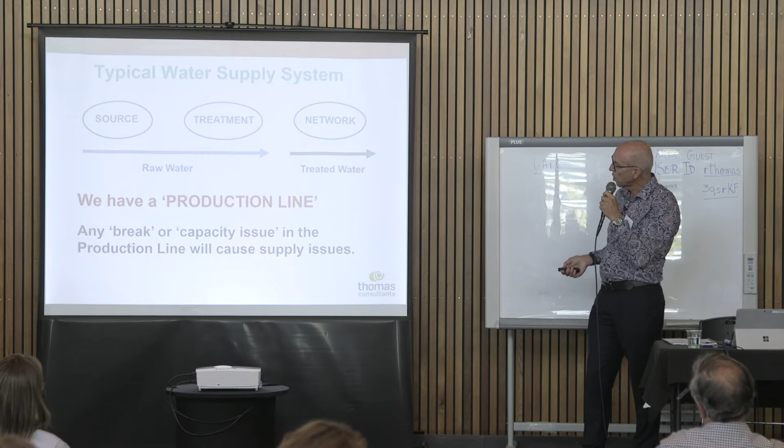And so any break or capacity issue in the production line will cause supply issues. So it might be back here, it might be in the raw water main, it might be at the treatment plant, it might be in a transmission main, it might be in a local. Any break in the line can cause supply issues. So there are supply risks and there are capacity issues. So I'm going to talk for a bit about risks to sources.

Now we all know this is a common one. Under average rainfall causing low levels in lakes, rivers, storage dams and aquifers. So we get that around New Zealand quite a lot. We've had a fantastic summer, if you could call it a fantastic summer, but it hasn't rained in Auckland many days for about the last 3 or 4 months. So we're certainly getting it here in Auckland, and it happens around New Zealand, causing low levels.

Algae in stored water. You can get algae turn up in a storage reservoir that's used for water supply, and all of a sudden it needs extra treatment or it's not treatable, so that can be an issue. River and dam levels are so low, water intakes are left high and dry. That's nearly happened to a town in New Zealand probably around 10 years ago, but I recall it happening. And what a disaster that would be if you can't get the water out of the river into your water treatment plant.

Storms affecting raw water quality in streams and storage dams. There can be inundation with silt-laden water. A treatment plant can't treat brown water, when it's that bad. So these things can happen.

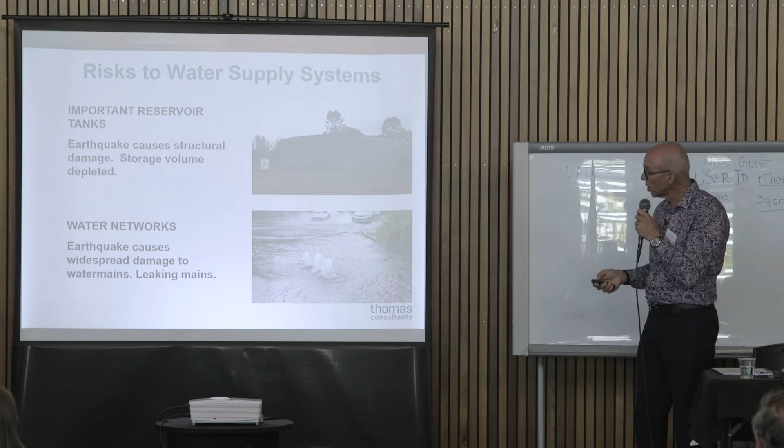So many of those above risks could be considered short term. We're talking days, weeks or months. And hence the main issue is maintaining supply during the event and while repairs are being made until supply is reinstated. So any available storage becomes critical, and you don't want to run out of water or you're into tankers, etc.

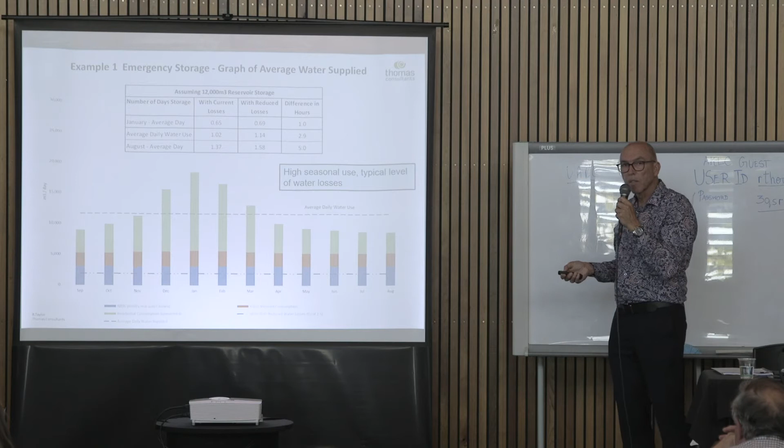So what am I saying here? I'm saying, assuming this town had, say, 12,000 cubic metres of reservoir storage, which is about an average day. See, that's 10,000, 15,000. So the average daily water use is around 12,000. And quite often towns have 24-hour storage. Well, with the current level of losses, in January, you've actually only got 0.65 of a day. Average daily use, you've got just over a day, just over 24 hours. And in August, when you've got low water use, you've actually got 1.4 days. So you've got more than a day.

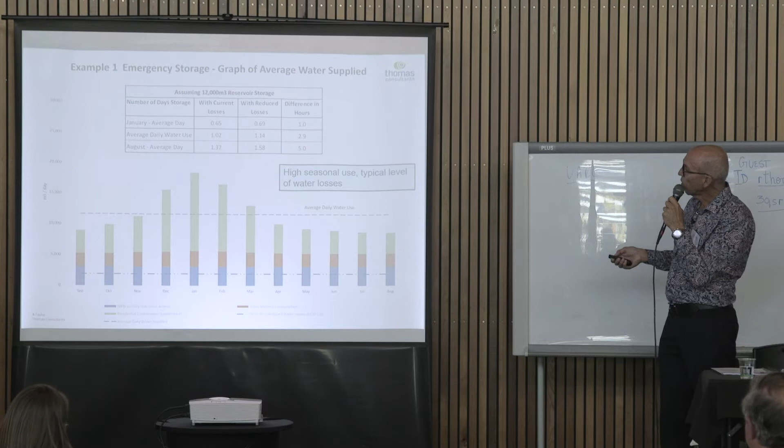Now, if they reduce the losses down to here, those figures improve to 0.69, 1.14, 1.58. So the difference in hours, you can have an extra hour in January. It doesn't sound much, but you've got an extra hour. For average daily water use, say in November and around this time of year, you'd have an extra 3 hours of storage, and in August you'd have 5 hours. So over here you've got 5 hours of storage.

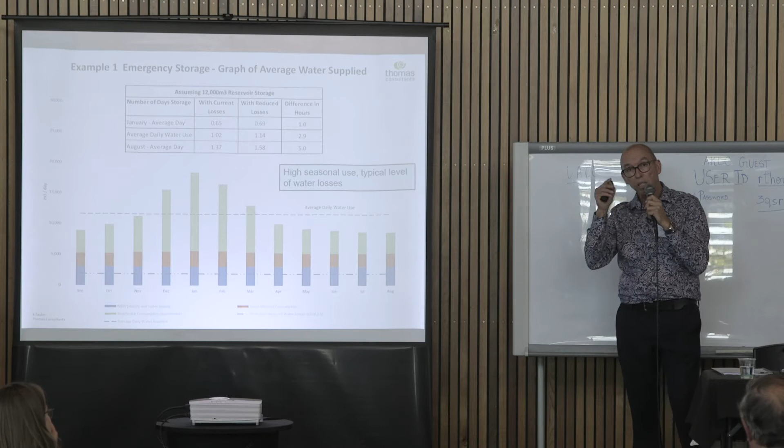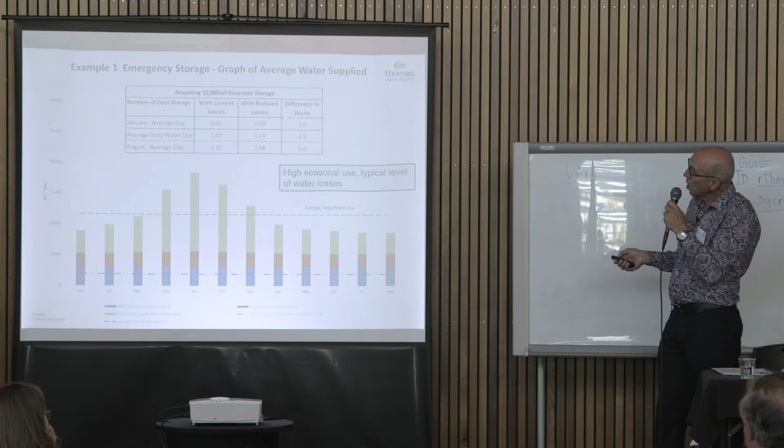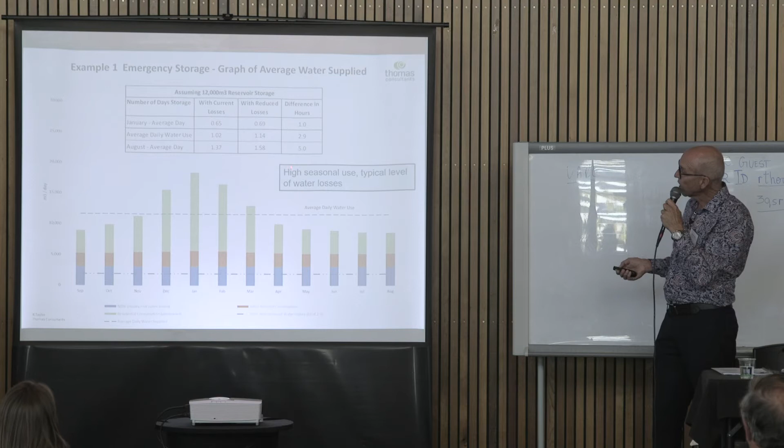Now, why is that important? Because you don't know what's going to happen, but if you get a slip, like actually Taupo had a bad slip, didn't they? It went down into the lake, and it wasn't a 5-minute job to restore supply. But if you've got a broken main, it typically might take 5 hours to fix. 1 hour out of 5 hours is significant, it's another hour. And similarly, these other numbers. So even reducing a moderate level of losses to a better level of losses can have an impact in an incident. So that's what I'm trying to say.

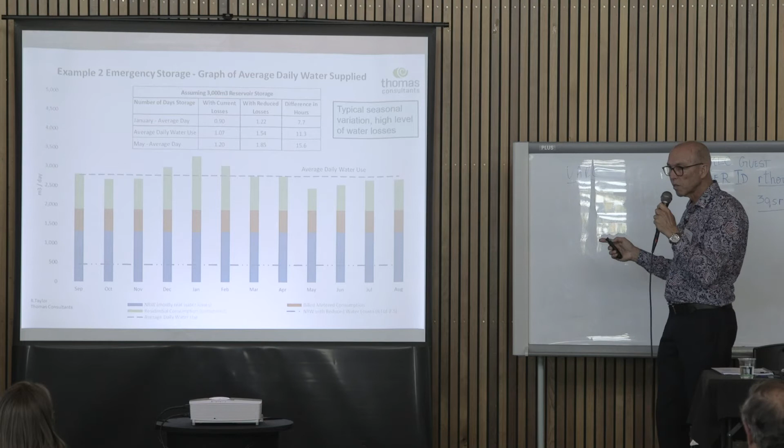So if they reduce it down to this level, an infrastructure leakage index of 2.5, for January, the average day, and for May, you'd have an extra 8 hours, 11 hours, 16 hours. And the numbers are a lot bigger because you've reduced the losses by a lot. So if you have an incident that takes out part of that production chain that is measured in hours or days, this can be significant. So that's one reason I think water losses are important.

What's happening with climate change? Well, I think we have had significant periods of hot weather resulting in record-breaking water use and demand, and we've had that in Auckland, Northland, certainly this summer. And actually, also with COVID-19, water demand profiles are changed as people's travel and holiday arrangements are altered. So you've got a whole lot more people holidaying in New Zealand, I think, and so things have changed.

Now I've got a real-life example here, because I was up north, and this article turned up in the paper. It was a good little article. Far North urged to conserve water. So there's a call to conserve water. So as a network operator, we can reduce water losses, but obviously there's the whole consumption part, water use on property, where you go out and you ask customers to reduce their water use. So that's what that's about.

Here we go. Unprecedented demand is breaking records. And that was partly because of the hot weather and partly probably because of COVID. So there was unprecedented demand up north in this particular town. Level 2 restrictions are in place, so they've brought in some restrictions for the customers. Increasing supply. The treatment plant is running 24 hours a day. Production has been ramped up from 3,200 to 3,375 metres cubed a day. That's what it says in here.

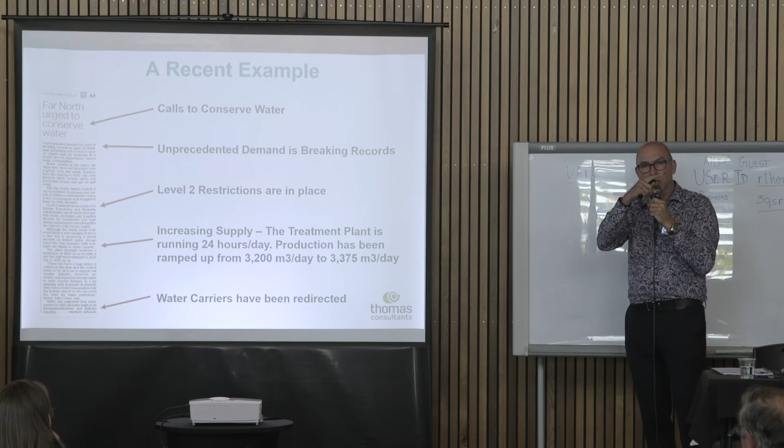He deserves the medal, doesn't he, the water treatment plant operator? He's cranked up production, maintained water quality, but got more water. Water carriers have been redirected. So those who need their tanks filled up out in the country, the carriers are going to have to go somewhere else to fill up. So here's a real life example of what can happen. We're in unprecedented times. These things can happen.

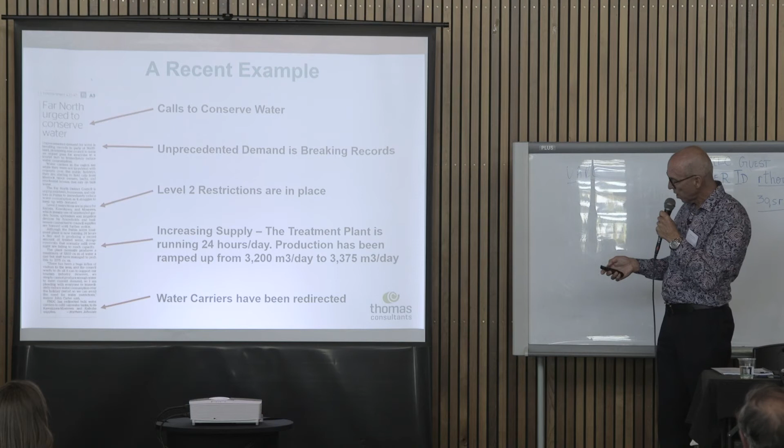Now I want to talk about supply capacity constraints. So we can have resource consent approved, a water take limit. So water takes have a consent take limit, and that might be being approached. That's a constraint. Capacity of the source intake and pumps. Capacity of the water treatment plant. Often this is designed to match this, but not always. Often these are all designed together, but possibly not. This might be reducing, in fact.

Capacity of pumps and trunk mains. Capacity of the reservoir tanks. Like I said, there's generally a 24-hour storage requirement. Some places have more, some places probably have a bit less. And there's capacity of the local network, and this is where the losses are that I'm talking about mainly, the real losses happening in this local network.

So let's go back to the graph we saw before. These bar graphs were average for the month, average for September, average for October, average for November, etc. This was the peak day in the month, so that's the peak day in January, and this is the capacity of the water treatment plant. So you're getting pretty close.

Now there's a lot of scope to go out and tell people to stop leaving their hoses on 24 hours a day and stop sprinkling their lawns, etc. So you could go and ask people to conserve water to get it down from here, but you haven't got a lot of headroom there, have you? And so reducing water losses, even this bit there, will basically double that. It gives you a bit more headroom, so that's another benefit of reducing losses.

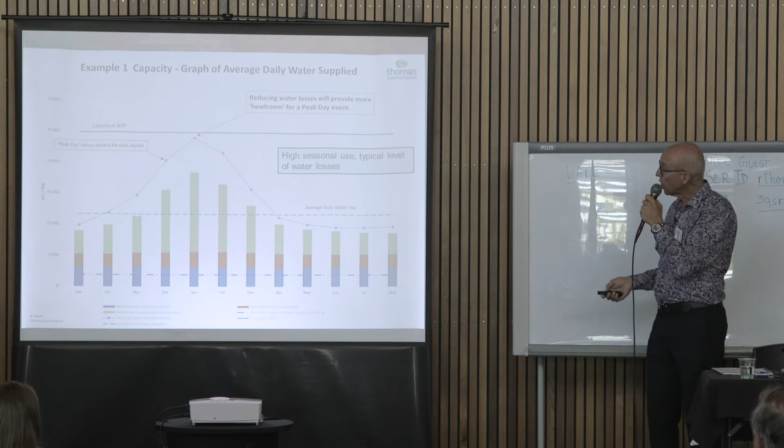And that's the same data, but now it's expressed in metres cubed per day. And this red line is a peak daily demand with a peaking factor of 1.5.

So we're saying the average water use on the peak day in this system is about 1.5. I think it's a fairly common type factor. But anyway, it's 1.5. This is based on their data. So here's a forecast peak day, and we've got a few horizontal lines on this graph.

Here's the current, first of all, so that's the 1.5, and this allows for about a 5% variation. This plus 5% for possible variance. So there's a bit of a probability that it could easily get up to here without too much happening. So basically this horizontal green line here is the current storage capacity.

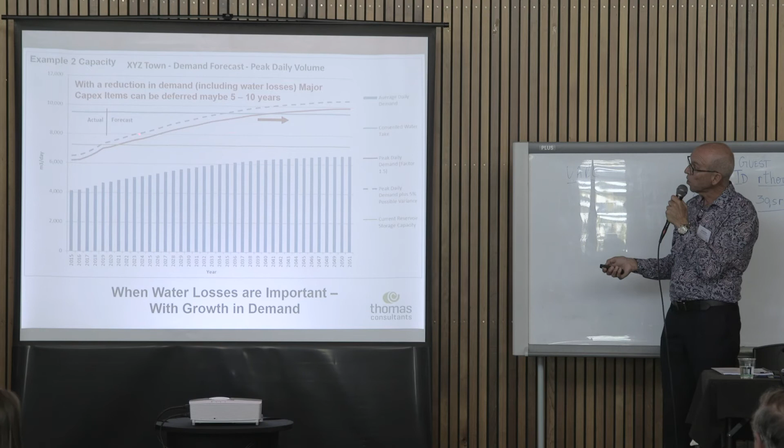So basically, with the reduction in demand, including water losses, you can easily defer expenditure on this issue for maybe 5 years. And the capacity of the water treatment plant could be through here too. If the red line's hitting that, then you might be able to defer that 5 years or whatever as well. And in fact, if you're aggressive reducing water losses, you can extend it. This depends how aggressive you are reducing water losses.

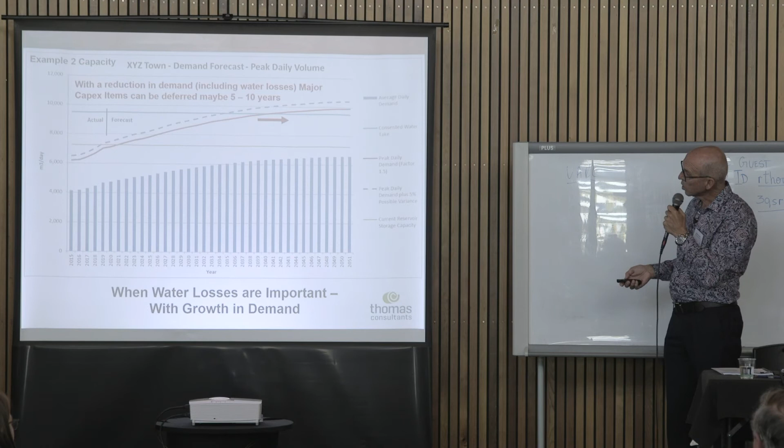This is another hypothetical situation which I've thought about, the cumulative effect on storage volumes. So let's say we've got a town where the storage volume just fluctuates like so, say 65 to 95%. So that's with the current level of losses, that's what it does.

Now with prolonged under average rainfall, say levels fall 10% each year. So the storage is going to be doing this, coming down here. So after 3 years, the cumulative effect of this is significant. And so you could be getting down to quite low levels, and then you've got demand restrictions and you're starting to produce more water.

So this graph is showing this scenario, with the current level of losses. If losses were 5%, so I'm using percentage now, so I'm breaking my own rules, but for the purpose of this scenario, that's cumulative, because it's just like going out to customers to save water. If they're saving water, it's cumulative and it's improving the storage levels, right?

Similarly with real losses, it's a part of demand. Whether you're saving water from here or from there, it's hitting dam levels. And so if real losses were 10% less than current levels, you wouldn't have a problem. So reducing water losses is one way of reducing overall demand, and it depends. Often dams fill and overflow, so you don't actually get to 3 years.

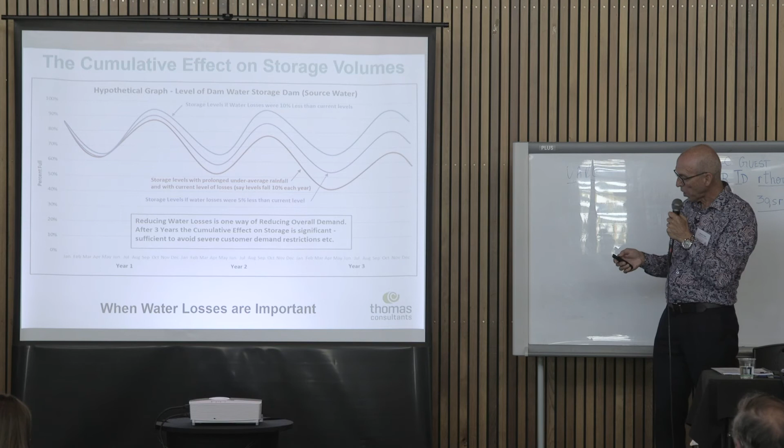I looked up some Sydney data, and their dams can store 6.5 years or something of daily water use in Sydney, even if it doesn't rain. The storage volume in Sydney is absolutely incredible, and they don't overflow for 10, 15, 20 years. But a lot of New Zealand dams, we have high rainfall, so they'll overflow every 2 or 3 years. But we're waiting for that to happen in Auckland, aren't we? But it probably will happen.

So the economic considerations. The decision for the water supplier when you have a supply issue: do we reduce demand, do we increase supply, or do we do both? And we may do both. There's no problem with doing both. But it's all too common that people love to build things. They'll say, "Oh, we're running out of water. Let's build a new big shiny treatment plant. CapEx is in. Borrow the money, spend." But the other way is, can you reduce demand?

This is more certain, there's certainty. You get it designed, you go through construction, it's all going to happen. People get nervous about reducing demand, and in terms of reducing water losses, if you go through the process, I'm sure you'll win, but it takes 5 years. I'll come to that soon. It's not an overnight thing, and often people leave it too late to do. But we should be thinking long term.

This was an article within the last 6 months. Revealed who pays the highest rates in New Zealand. Well, I wasn't too worried about what Phil Goff had to say, but look what it says down here. Central Otago District Mayor Tim Cadogan said that while low rates look good, water meters in the region had made a huge difference to the cost of infrastructure, which was one reason rates had been kept low.

So I know exactly what happened down there because they used to have unmetered water use, and customers were using 1,000 litres per property per day or more than that. Now they've put in water meters, even if it's down to 700, that's a 30% reduction. They will have had a huge reduction, so all of a sudden, they don't have to upgrade the water treatment plant. Everything's okay because they've got all the spare capacity. Well, I'm talking about reducing these as well, but obviously putting in water meters is very effective in reducing demand.

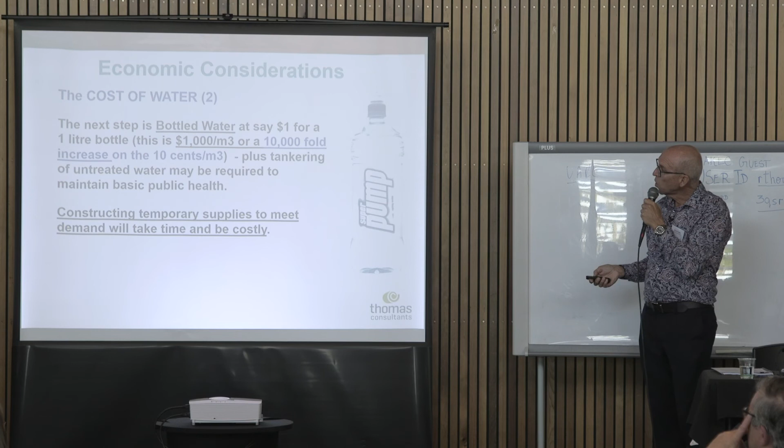So when you look at it, the cost of water in New Zealand is pretty cheap. But if you run short of water, it's not going to be cheap. It's going to cost you a lot of money, tens of thousands of dollars. Probably more, hundreds of thousands possibly.

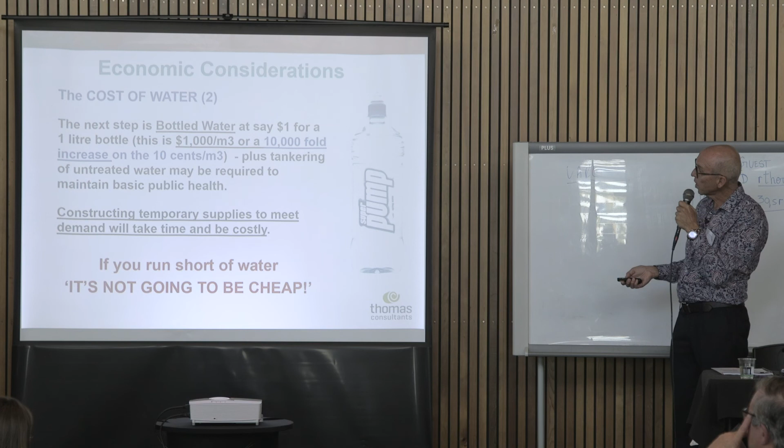So what are the main benefits of managing real losses to low levels? So in the short term, emergency storage will last longer in a supply incident. Significant costs to manage a major water outage and to import water will be minimised or even avoided.

So, even though you get an extra 2, 3, 4 hours, if you're running out of water, I've been there. If you're running out of water, it's not nice, and you have to take measures. And if you've got to tanker water in, it's going to cost you. And that's if you've got that option. I mean, that's an easy option, really. It might not be that simple.

Haven't they? So in the medium term, the cumulative effect of reduced losses can avoid low dam levels. That was what I showed you after 3 years. It could be quite a significant difference. Or to maintain aquifers for bores. Surface storage is one, there's underground storage as well, which may avoid the cost of managing an ongoing water shortage. And reduced losses will provide additional headroom for those peak days when water demand is excessive.

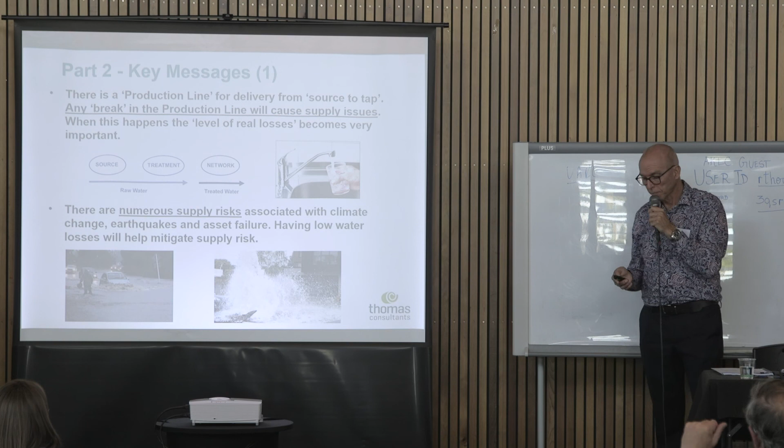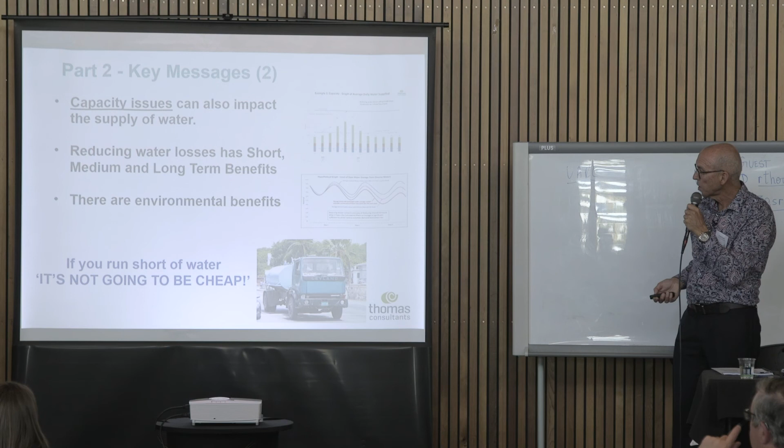Capacity issues can also impact the supply of water, capacity of the treatment plant. Reducing water losses has short, medium and long-term benefits, like we talked about, and there are environmental benefits. And if you run short of water, it's not going to be cheap. So that's the end of part 2.

So, are there any questions about that? Does it make sense? Yeah, I guess some of these things I've only really thought about in the last couple of years, or they've become evident. So anyway, any questions for that?

Most of the councils do not put it like this. We as humans take rainwater for granted and we push it out to the sea. What we like is a nice surface tarmac area rather than a lawn, because the rain is there, but we push that same water to the sea rather than recharging the aquifers. And in the long term, we can expect there's no water.

Well, there's certainly pressures coming on water supplies all around the world and in New Zealand, and there's competition for water. You know, you've got the dairy farms and cities vying for water on the Waikato River. So it's certainly an important thing.